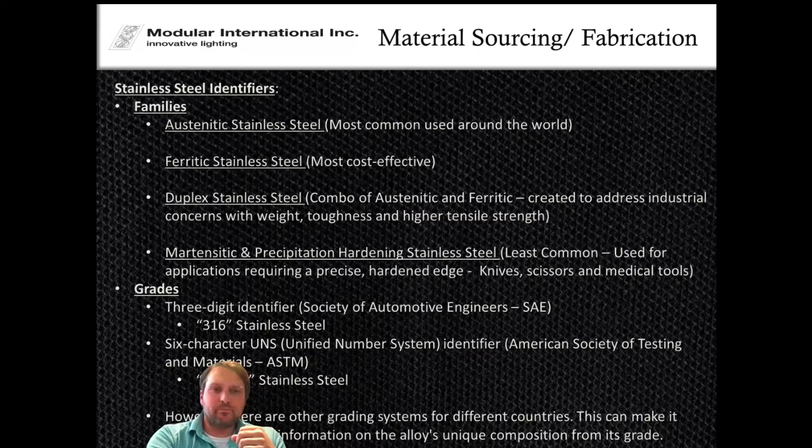When you start adding materials to increase corrosion resistance—especially for environments like hydrotherapy rooms, coastal environments, product that will be outside or in natatorium spaces, or laboratory spaces with corrosive chemicals—that increased corrosion resistance is very important. Speaking as a manufacturer, if you're a specifier looking to build lighting in those types of environments, we're going to ask what type of environment we're dealing with, what cues are out there, so that we can source the proper materials for the construction of that lighting fixture.

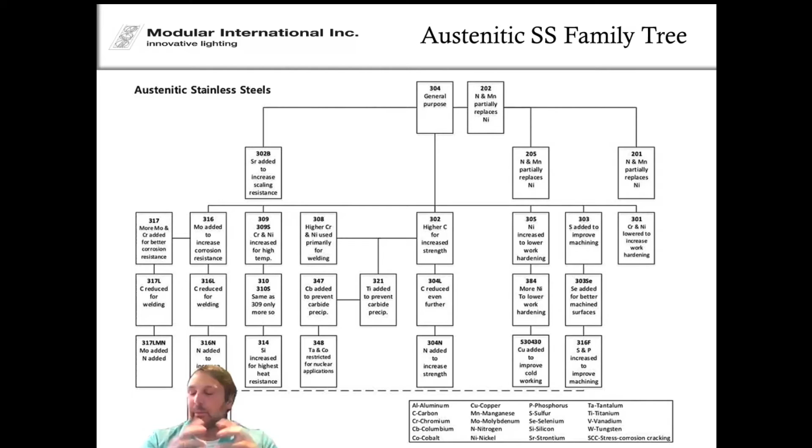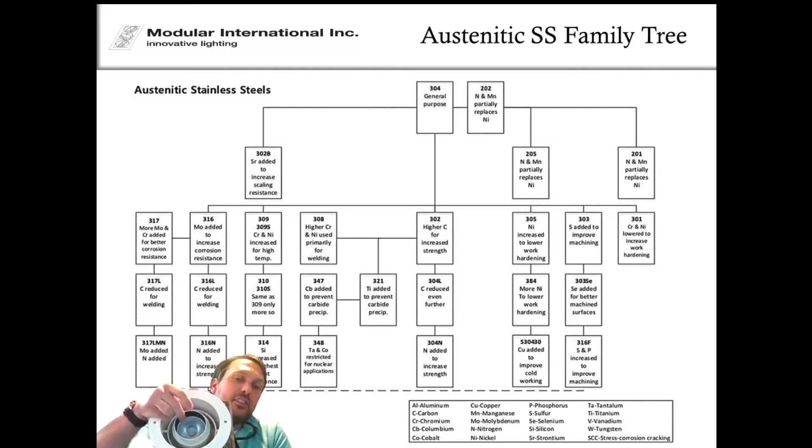So you're adding carbons, nitrogens for welding and increased strength, and giving it more sulfur and phosphorus for machining. When developing things like ring sets—on custom fixtures where you have double gimbal rings, housings and cylinders utilizing stainless steel—that machining quality is very important to make sure your threads hold up over years of making adjustments, sliding different optics in, and having that field-changeable characteristic.

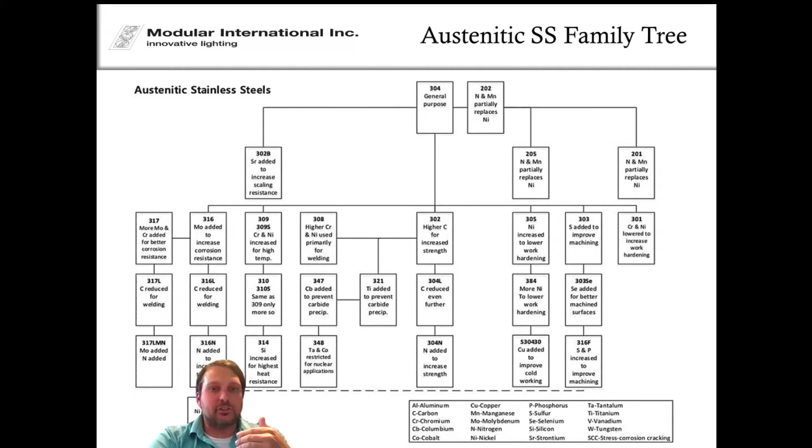Utilizing these different grades of metal fabrication is extremely important as a manufacturer, to provide that kind of solution for the design community. So really, the next couple slides will focus on some of these material utilizations on exterior rated products, and then we'll touch base on a lot of our interior multiples in different conditions as well.

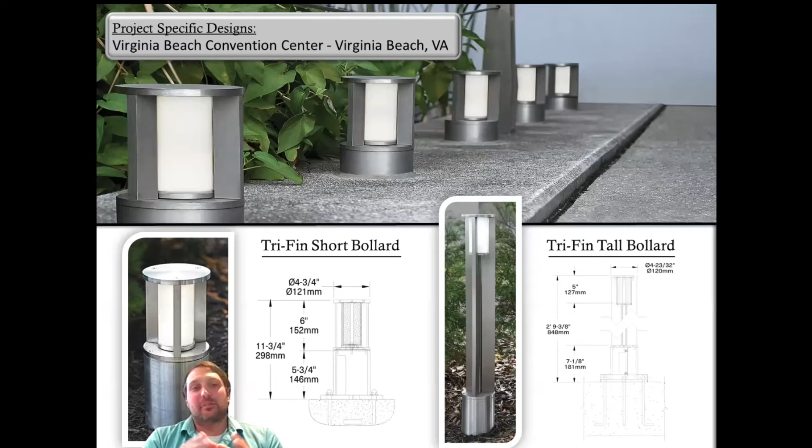From that point on, modern solutions have taken place. Different framing projectors for all the artwork on the interior and the exterior have been updated over the years to sort of show that patina and that historical vibrance for this particular museum. It was important to have a solution that reflected that. The Virginia Beach Convention Center, we actually utilized 316 marine grade stainless steel in the construction of these short and tall tri-fin bollards.

The short bollards were used to accent the water gardens for the entry and exit points of the convention center. The taller ones were used across the street in the adjacent parking area for pedestrian traffic to and from the convention center, with a little bit of shrubbery and area illumination coming out of the taller bollards as well. These all, I should say, most of our exterior products, it's important to note that stainless steel does have kind of a price tag to it.

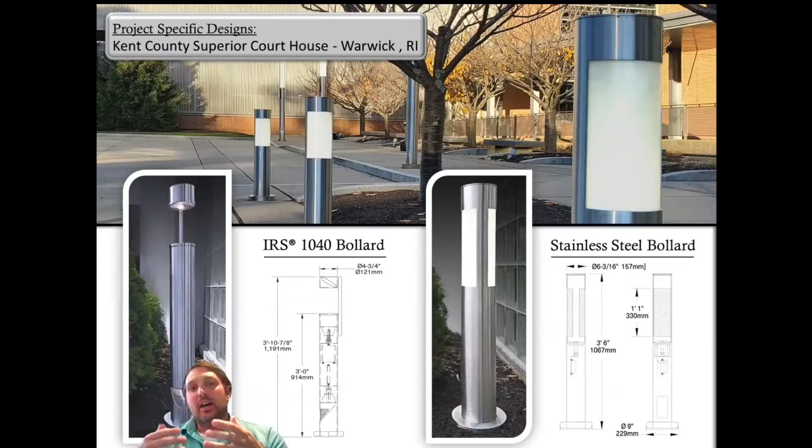But if you're ever looking at utilizing exterior products, we can offer you aluminum with a powder coated finish for a body style that'll give you basically a nice, cheaper alternative to it, but also added longevity. So not every project has the budget for stainless steel, but we can give you that option here to consider moving forward as well.

So Kent County Superior Courthouse in Warwick, Rhode Island. This is a particular install where we use 2 different styles of fixtures and multitude different variations. The IRS 1040 bollard, we'll start off with that one. You can see the detail here to my immediate right.

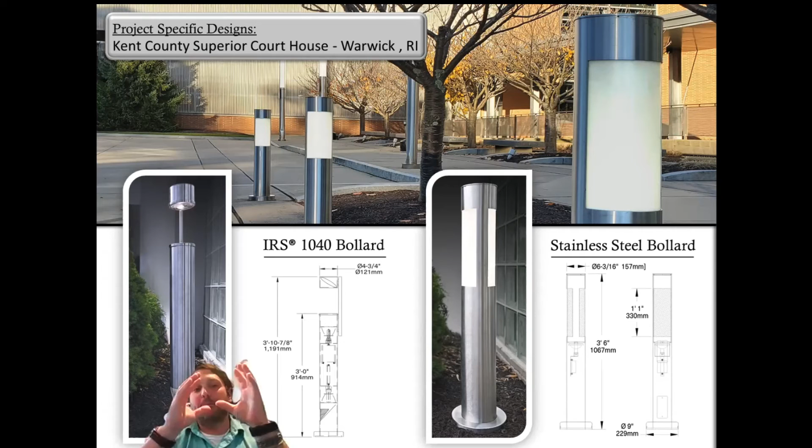You can see that it has 2 different lamps housed in the actual cylindrical body of that bollard. One shines off the polished metal surface and bounces that light out in front of the bollard for direct area illumination. Then you have a top bulb that'll shine up through a gasketed surface and into a top cap. Within that top cap, you have 360-degree rotation and adjustment with that metal surface up there to take that light coming up and bounce and redirect it away from the bollard in any condition you're looking for.

So in this particular project, they actually utilized it to illuminate seating areas that were a little off-center, accent area illumination, a little bit of shrubbery illumination for these exterior courtyards. This basically gave a nice reduction in glare, but also it's customizable. You can lower that top cap depending upon your project and redirect that light out into certain areas or certain degrees based upon what you're looking to illuminate.

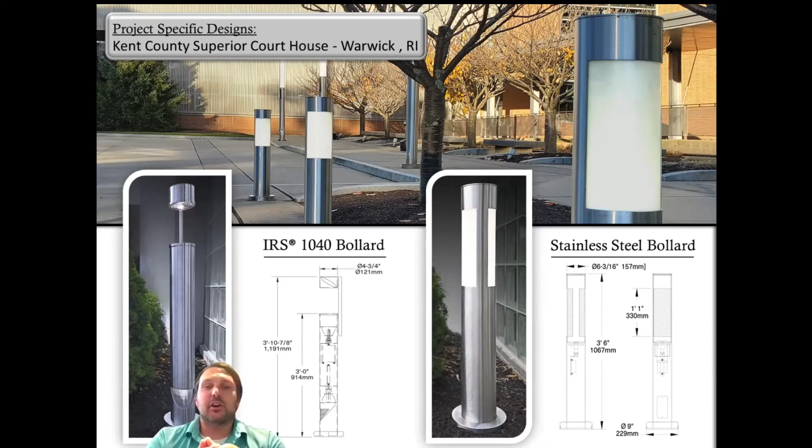The stainless steel bollard to its immediate right, you can see in the top photo, we actually did this in 2 different height conditions on the project. The shorter ones were used all around the grounds of the courthouse for pathway illumination and a little bit of illumination for the garden areas. The taller ones you see in the back are about 16 to 18 feet tall, and those were used mainly for the front of the courthouse for general purpose illumination along the facade.

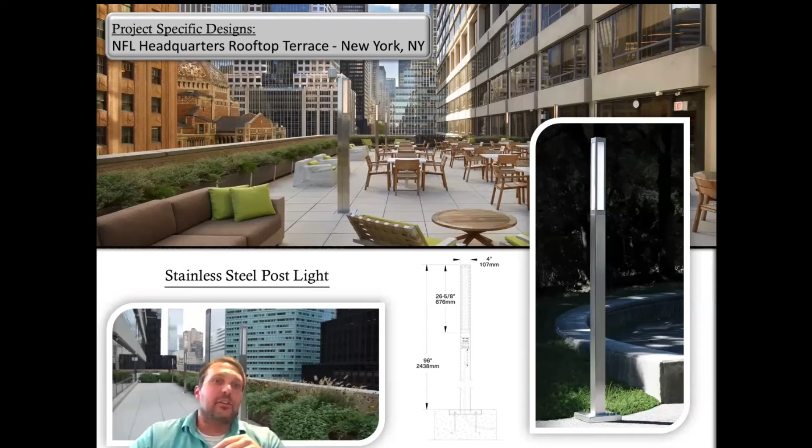Local project for you guys in New York City: the NFL headquarters rooftop terrace. We produced these square stainless steel post lights. We also utilized these same fixtures on Penn State University's biomedical and chemical engineering building, where they used an aluminum body style with a black matte powder coated finish to match the curtain wall panels on the exterior of the building. So once again, giving you a dual purpose, dual material approach for any of our exterior fixtures.

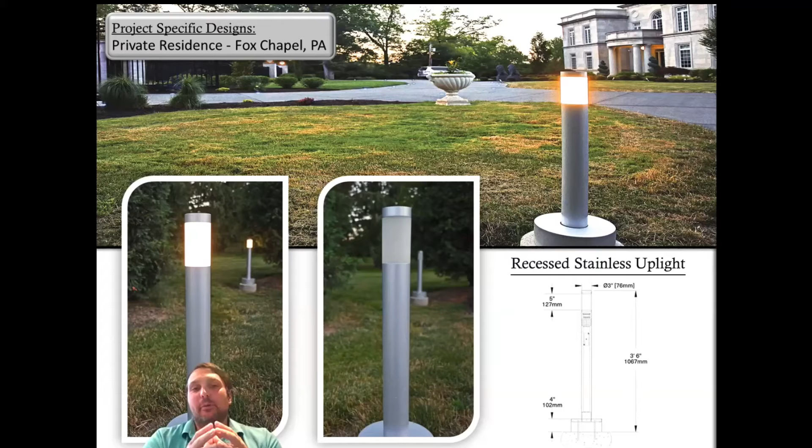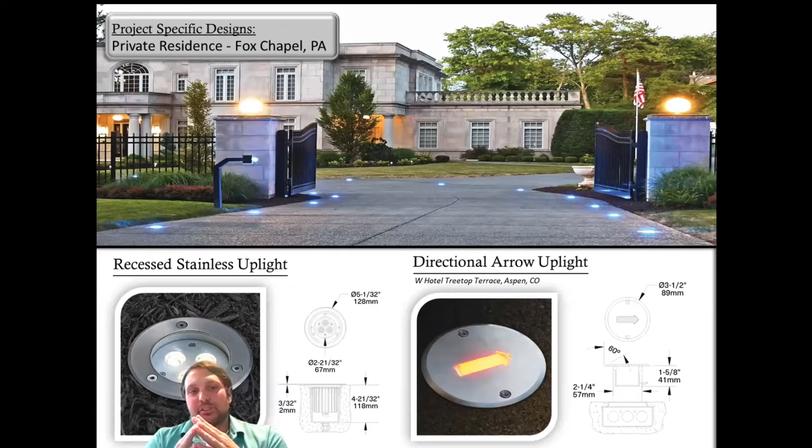On the same project, we also produced these concrete pour uplights. These uplights can include any count of these 1 watt LEDs - 5, 6, 7, 8, 12, whatever you want - as well as different Kelvin temperatures and spectrums of light, sourced in a multitude of variations from reds, greens, blues, warm whites to whites.

It's kind of funny talking about this concrete pour housing, because the fixture I held up earlier is actually a 316 stainless steel fixture we worked on with O'Blaney on a couple different projects now, which has a removable inner can. You can see with the trim there are two different screws, and this can comes out of the housing. So we can ship the housing ahead of time and use the replacement inner can to secure to the housing - now that concrete ceilings are becoming more popular - so the housing can be fitted in there. You pop in the can when everything's ready to go. It gives you adjustment with the LED modules inside, so we can do different styles of bevels, different trims, and a multitude of different things with these fixtures.

A lot of these really went through the rigors and were put on a bunch of different projects, so it's a nice little representation of that modification from the standard you're seeing here on screen.

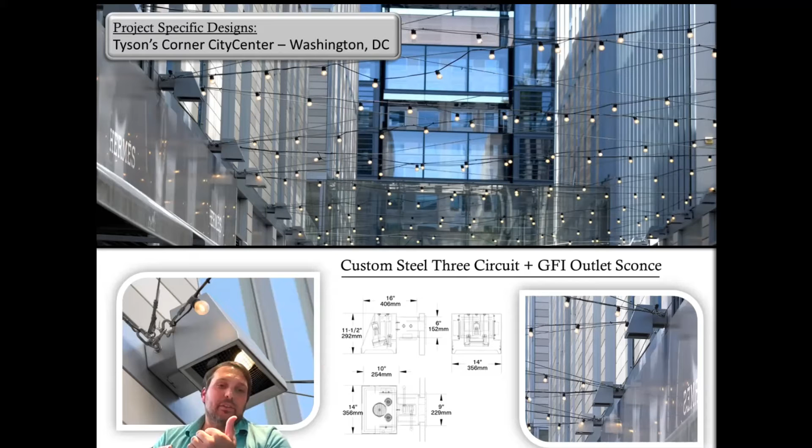All of these were wired for three circuits. Right above my head, the light bulb going off is the first circuit running 277 volt for entertainment lighting. Then you have the unilluminated skirt bulbs right above my head as well, that are 277 volt on the second circuit. And right to my immediate left, you can see that exterior rated GFI receptacle on the underside of every one of these wall sconces.

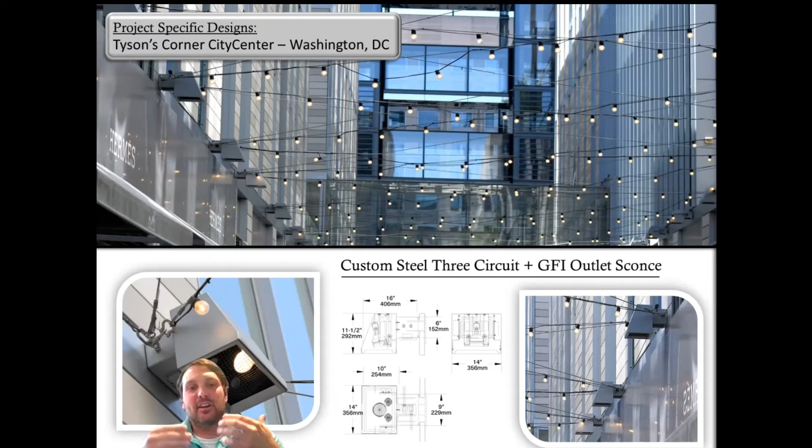We were also asked to tie in these eye bolts you see there that support the aircraft cable. Each individual sconce is able to power these Edison bulbs and different art exhibits that hang from the aircraft cable. These sconces are tied directly into the Rainscreen facade on this mixed-use building complex here in Washington, D.C.

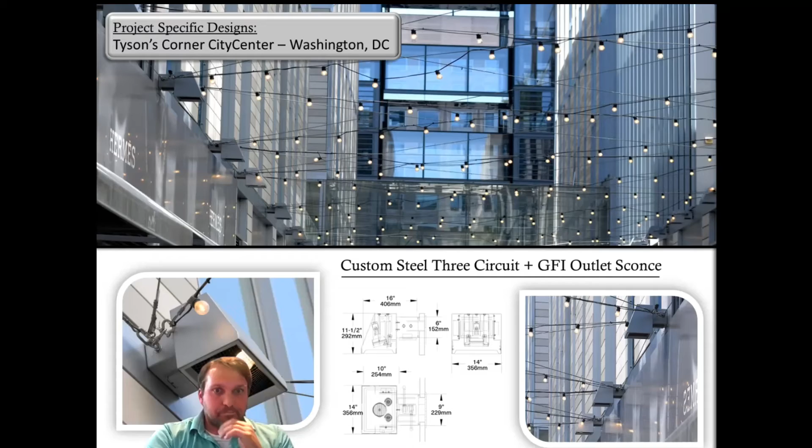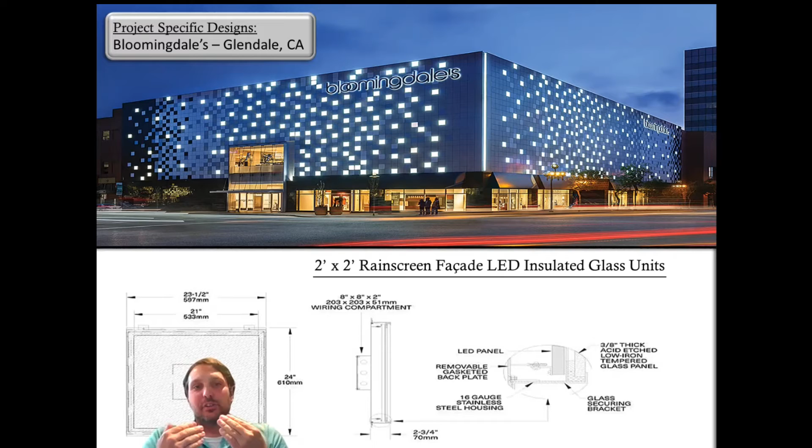We also get involved with Rainscreen facade lighting, which is what James kind of hinted at early on in his intro. When we worked on this project with Bloomingdale's in Glendale, California, they approached us with the initial design for the Rainscreen - a drained back ventilated Rainscreen system utilizing 2x2 metal panels.

We were able to work with them and engineer these low iron acid etched tempered glass IG units that are completely sealed around with a basic adhesive used in making these IG units in the architectural industry. Inside there, you have a side lit LED panel, and everything is completely framed around that with a solid 316 marine grade stainless steel frame and backplate with that wiring compartment.

What we were able to do is work with the team to leave a large enough gap between the actual panels and the IG units, so that if you have to replace one of the IG units, you can go in there with an angle grinder and just cut out the clips that you see on the drawing behind me. From that point, you just pop in a new unit. You don't have to disassemble any of the rainscreen system to replace one of the lighting units.

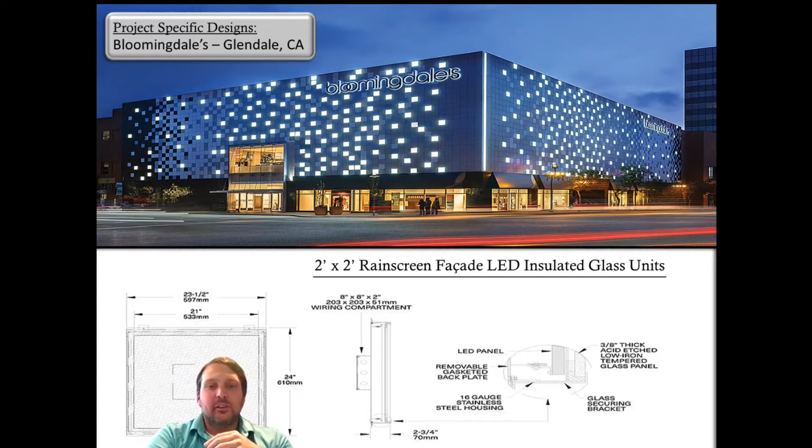We've worked with our reps across North America on a bunch of different projects, utilizing more rectangular shapes, custom shaped rainscreen inserts, more linear style now. It's becoming very, very popular. So that's something we obviously can engineer and work with you on.

We do get involved with a lot of wall washing, halo lighting for pendant fixtures on the interior, and also cove lighting, which we offer for the exterior. So if you're working with wall washing or different projects for retaining walls, or accent illumination for pathways, whatever it may be, we have linear, wet rated and exterior rated products that we can provide those solutions for as well.

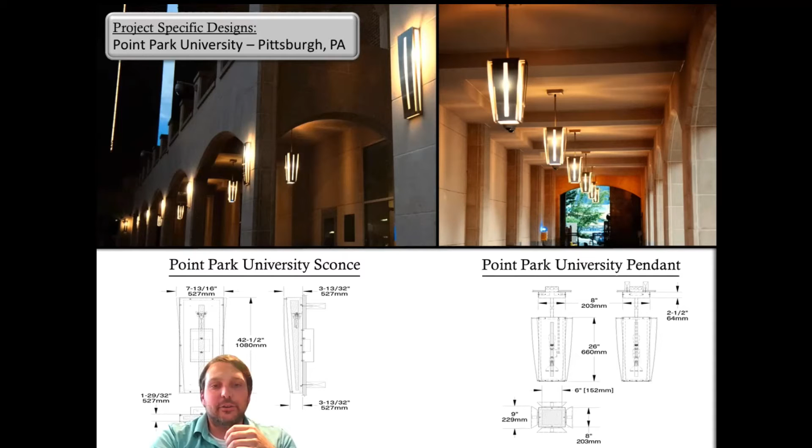Lastly, for the outdoor, a nice little retrofit install with a 100-plus-year hotel here in Pittsburgh called the Renaissance Hotel. We were able to utilize the canopy structure to engineer out lengths of our trimless linear fixtures for the interior, or trough fixtures, and utilize our MR16 size LED modules to give a more modern upgrade to their historic marquee. That was a nice little retrofit once we were able to engineer everything together.

So talking about the multiples, this is really what Modular has been known for over the years, and this is what we still produce. We offer the traditional trimless and trim style, new work and retrofit style housing. We offer our LED modules, and we still offer LED direct replacement lamps and also legacy lamps for all of our interior multiples fixtures.

We'll talk a little more about the customization and some of these installs coming up here. But it's important to know you have 360 degrees of adjustability with the double gimbal ring, and also 45 degrees of adjustability with those LED modules, with really any type of configuration.

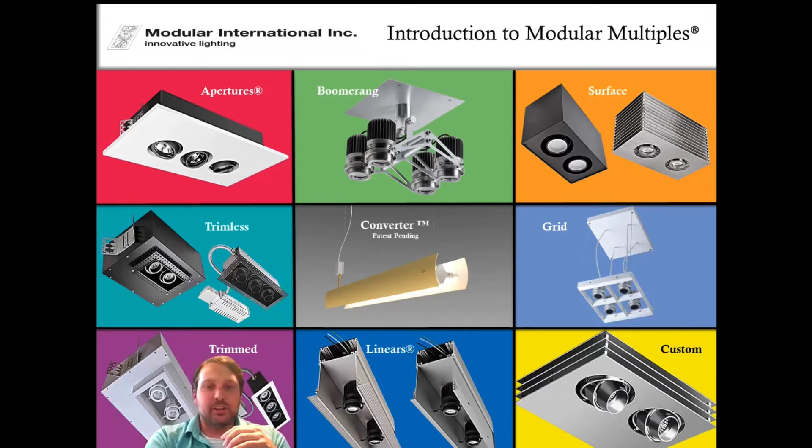Utilizing 316 marine grade stainless steel, like I said, is mostly for the exterior, but we also do it a lot for the interior. University works for hydrotherapy rooms and sport complexes, laboratories, natatoriums - we've done quite a bit of that with the higher education building sector.

The University of Delaware's new Whitney Athletic Center is a prime example, where we utilize airtight housings with 316 marine grade stainless steel housing body, trim plate, and the lens assembly is a tempered glass sealed lens that goes over top of that. We're actually working with 4 different universities right now, doing 3 light, 2 light, and 1 light fixtures throughout the South on different university projects for kind of the same environment.

Uber Advanced Technology Center there on the right - we utilize 3 lights, 4 lights, and our linear trimless fixtures throughout their open concept office, meeting rooms and spaces throughout their new Advanced Technology Center here in Pittsburgh as well.

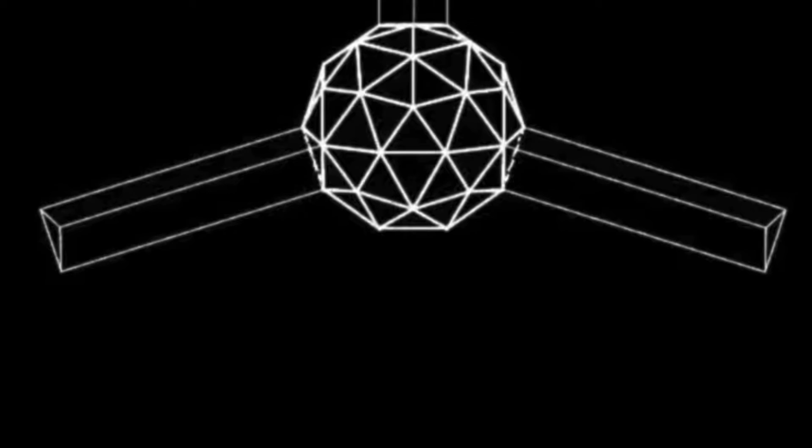Did you guys have fun doing it? It was more challenging than I expected. We were very demanding of what we wanted to achieve, and even fell short on our aspirations, but we had a fun time doing it.

And we had a fun time watching it. A big shout out to Luminarch and their team, Attila and Nelson. Thanks for joining us on that.